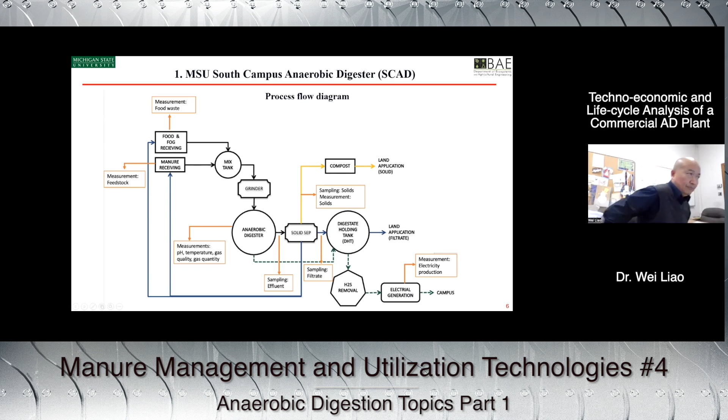And those yellow boxes are the samples we take. And because we have labs next to the digester system, we do intensive measurement on those and monitor the whole system. This is why we generate, later you'll see, all the data we have. So that's kind of the process flow chart for our system.

And then kind of jumping to the waste streams that we're handling. Roughly, we handle 8 to 12 different types of waste streams. And manure part, we do have the dairy and the chicken and the swine manure into the system. And the food waste is very much the pre-consumer and the post-consumer food waste.

But recently, I think, Chad, you probably run into the same thing for your digester. A lot of requests for the FOGs, the fat, oil, and grease. Currently, we dump a lot of FOGs into our digestion system. However, that's a very critical and very tricky part, the carbon-nitrogen ratio, because FOG carries a lot. FOG is good; however, if you dump too much into the digestion system, it could cause the failure of the digestion operation. So we monitor that very carefully, based on the carbon-nitrogen ratio, and also based on the fatty acid concentration.

And we have different systems to dump those wastes into our system. Some from the cafeteria come in carts, and we do have a tipper to dump into the pit, and the large dining halls on campus, like Brody, do have their pump machine, and they send it in containers to dump into the system, and this is a kind of truck that brings the FOG to our system, and then some other fruit and vegetable, a pretty big piece.

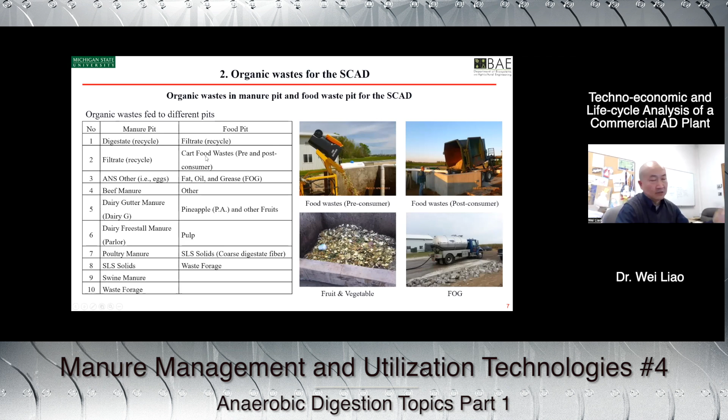So we do need a shredder or grinder to reduce the size before pumping into our systems. So these are all kinds of, see, the very diverse feedstock streams we have. So just from fat to food to pineapple peels. And one time in Michigan, because of the egg issues, the entire cart of eggs we just dumped into our systems. We handle those things in two pieces, the manure piece and the food piece.

And then we record all the data. So we have this radar chart, and for each category of the waste streams we handle, we track them on a monthly basis, 12 months, and we make those charts. We started this new system in 2013, so we collected all the data from 2013 till now, but this presentation just ends at 2020.

You can see the food piece and manure. We actually feed around 47% of our total digester feed from food waste. So it's a large portion of food waste.

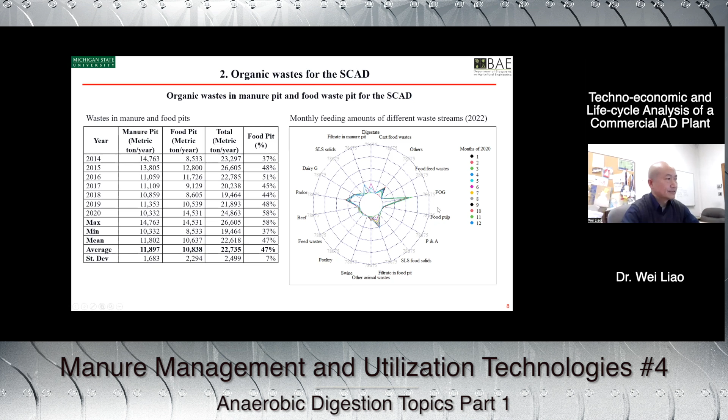I remember somebody asking us about the RIN numbers in terms of co-digestion or biogas from co-digestion. That's very tricky, because with that much food waste it's hard for you to claim RIN numbers. The RIN number is based on the particular D3. It's based on the cellulosic base. Manure could be, but food waste is a bit tricky. So that's something I think Nick can probably answer a little bit more from an EPA standpoint, the regulation, those things.

So this is our organic waste, and we do run detailed characterization of those feedstocks, like our manure from the dairy farm and the beef. We have some beef manure there too, and those different things. I'm not going to jump into the detail, but we do the total solids, volatile solids, pH, the electrical conductivity, and the soluble COD, TN, TP, ammonia.

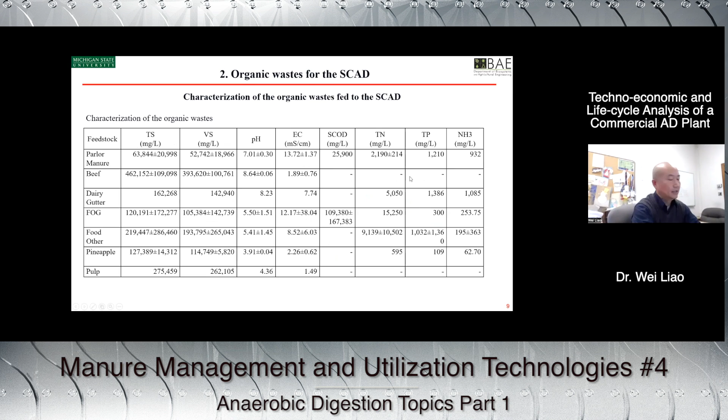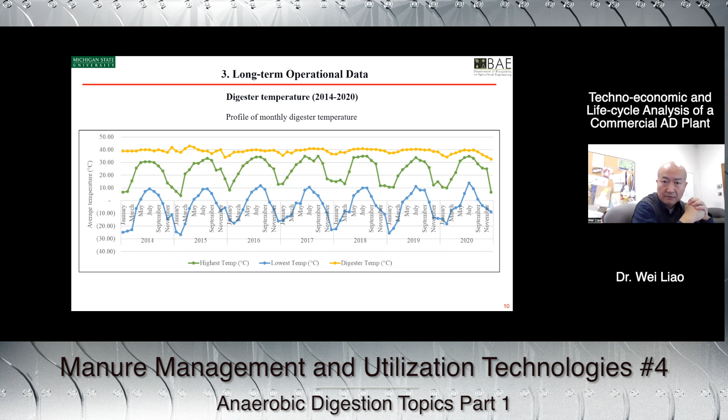Again, this is our consideration with such a big tank. If the temperature varies, it's very hard to bring the temperature up. So we're trying to maintain the temperature a little bit higher than the required 35 degrees C. I think most digestion operations around the country are probably doing the same thing as ours.

And then the HRT, we record based on feeding and do the calculation. Our HRT is between 20 to 25 days. There are some occasional variations in the feedings. Again, this is an agricultural operation. It's quite stable, but if you look on a daily basis, again, big variation. Sometimes we get like 30 days retention time. But the average is around 25, 26 days hydraulic retention time for our digestion operation.

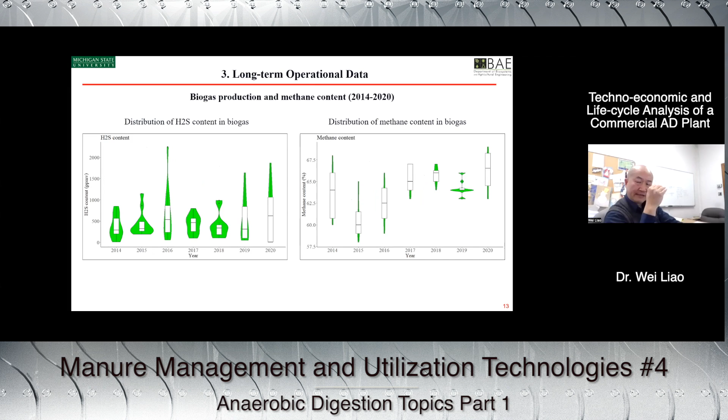Recently, a bit higher because we add a little bit more carbon stream into that. We go up to 70%, but the average is around 65% of methane content, volume based. And then we monitor the total solids in the digestate before it's sent to the liquid-solid separation. We do monitor all those total solids pumping to the systems, and nitrogen too, phosphorus, and pH.

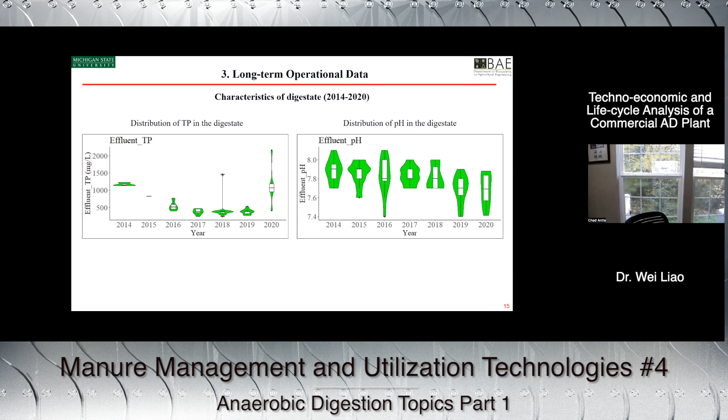Again, pH, as Chad earlier mentioned, is the simplest, easiest way to give you first-hand information on how healthy your digestion is. So if you can maintain about 7.5, your digestion is okay, doing fine. And if you're dropping quickly down to 6 point something, below 7, then there are some issues. You do need some red flag. You need to consider the feeds you feed into the systems, probably too much carbon, those kind of stuff.

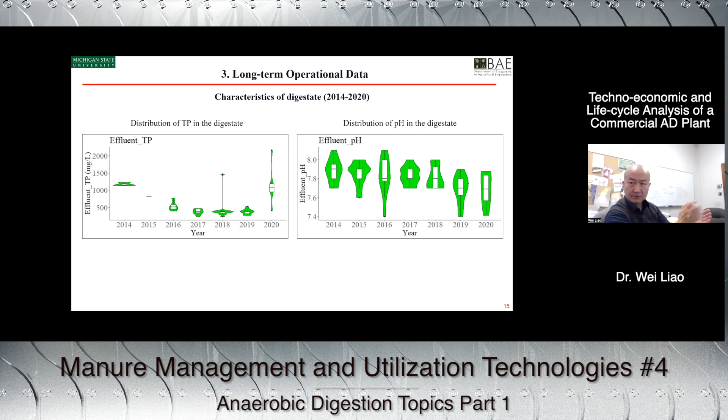And then the TS/VS reduction. Again, in our system, we have roughly around 43% total solids. Again, the particular mixed streams from manure, our dairy farm is organic bedding. It's not sand bedding, but still there's something in there that influences total solid reduction. But volatile solid reduction is around 48%. It's a typical number for agriculture digestion systems.

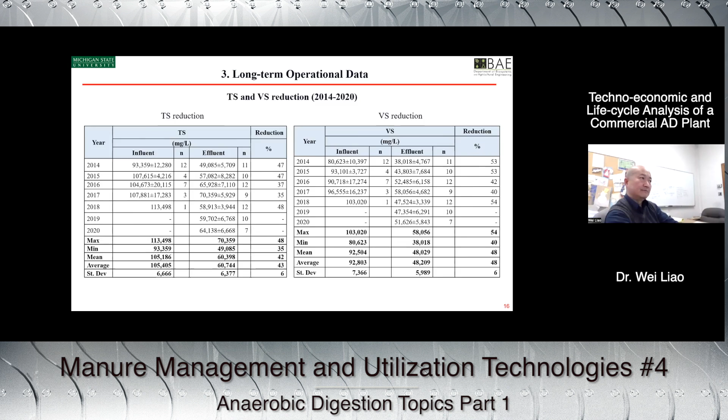And this is a kind of summary for our operation, really trying to lump everything together for the past 8-9 years of operation. Our input, based on yearly average, we roughly feed 22,000 metric tons of waste into our system. Literally split half from agriculture manure, half from food waste, and then we generate, on an annual basis, 2.67 million kilowatt hours of electricity.

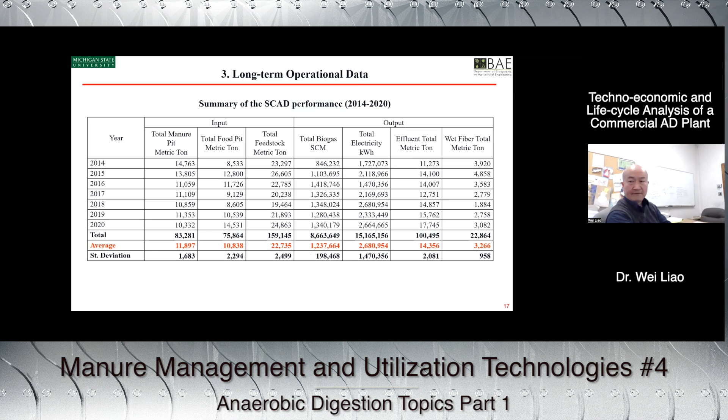And then the effluent was separated. We have the wet fiber, and we record it because it is used for composting. We do need a meter to know the amount of wet fiber sent to our composting facility. So then, with all that operational data, we want to summarize. We want to do techno-economic analysis and life cycle analysis. So we actually have two aspects on that.

At ADREC, we do a lot of feasibility studies for different company farms around the country, around the world. Actually, we do something for Latin America too, for feasibility studies. We gain certain numbers, put our experience on, run those analyses, and show them the payback period and other information they need to know. But for this techno-economic analysis and life cycle analysis, we get all our data, put it together, and really look into the real performance of our system.

So what do we do? This shows you the approach, and we have a lot of data; this presentation cannot show all of it. We run mass balance first because we record all the data on an annual basis. This is the average between 2018 and 2020, but we run it every year. The mass balance covers the amount and characteristics of feedstock, biogas production with different composition, methane, carbon dioxide, effluent, wet digestate, the filtrate. We keep tracking all those numbers because we need a mass balance to run the next steps, the techno-economic analysis.

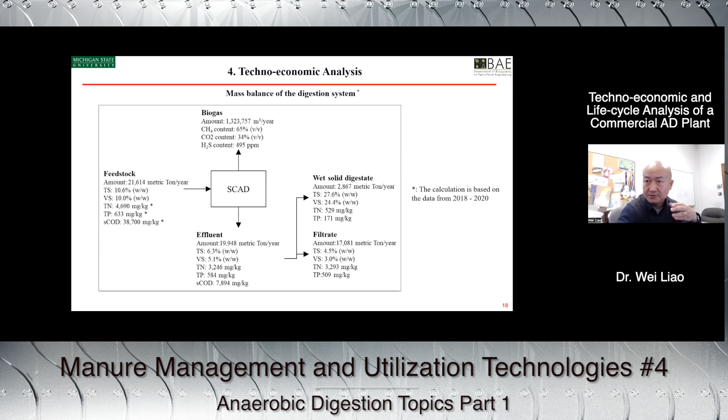So building on the mass balance, we record energy consumption and energy generation, and run another detailed energy balance. We meter everything. If you look at heat input and electricity input to maintain digestion operation, and all the energy output from biogas production, our system in the Michigan winter is pretty cold, and we roughly use 10% of the total biogas energy to maintain operation, pumps, the heating systems, and all those things.

Which means, as an agricultural digestion system, we do have pretty good net energy generation. 90% of the biogas energy could be revenue, used for renewable natural gas, which we talk about later on, and then electricity, or even using methane as a chemical to produce some other feedstuff.

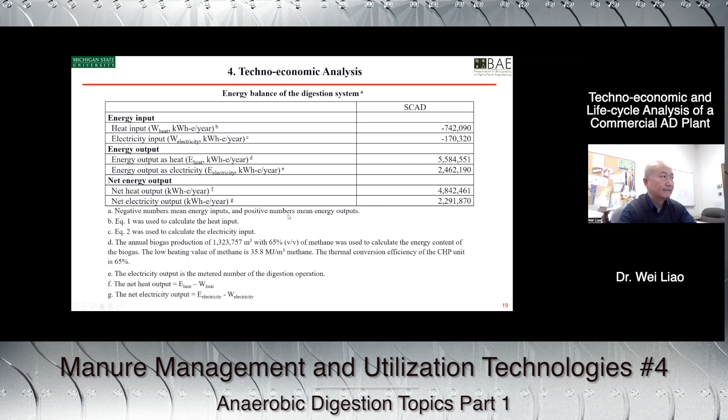So this energy balance builds on the mass balance, then incorporating other parameters, the capital investment and operational investment, we can run a TEA, techno-economic analysis. So roughly this is our investment. Back in 2013, we put $3.5 million to build the system.

And of course, the digesters is a big component. And actually, I have to emphasize on it because we have two tanks. That 2.1 million gallons of holding tank, we spend quite a bit of money. It's very large, right? This is why currently our research very much focuses on digestate treatment.

We want to develop economically feasible solutions that can treat liquid digestate right away, and then reach at least discharging standard, either linked to your municipal wastewater treatment plant operation, or can we reach high quality so we can direct discharge. Then we can reduce this digestion cost by half, and really save quite a bit of money there.

And the other part is, I have to say, the electricity part. I think we have somebody from the consulting company that has been doing the paperwork. Those interconnections are really a hassle. I can tell you, Chad is here too. Let's talk to those utility companies, right? And with interconnection, particularly the volume matters. If you have a megawatt or a couple megawatts, the production probably puts you in a little bit good shape. But for those small, medium agriculture operations, it's hard to do that kind of stuff.

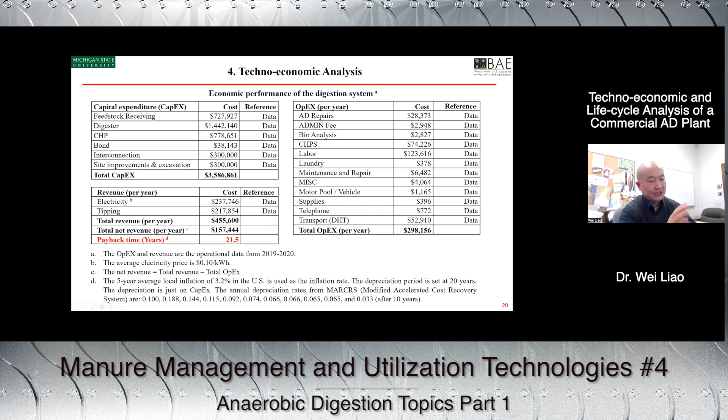This is why we need a package of solutions. Renewable natural gas could be one. Right now, MSU is very much involved in electric vehicles. So if we can turn electricity from small dairy farms into EV charging, that's another story. That's why the E-RINs, a lot of rumors, as Dave mentioned, and we really don't know what the E-RINs look like. Hopefully the regulation or policy will benefit digestion technology in small, medium operations. We can talk later on regarding our techno-economic analysis. And we did the sensitivity analysis, you can see the revenue, electricity, the cost.

This calculation is based on 10 cents per kilowatt hour selling price for electricity. If I increase that selling price by 25%, the payback period is reduced to around 10 or 11 years. 10 years is much better than 21 years. And this is about revenue streams, something we need to really focus on.

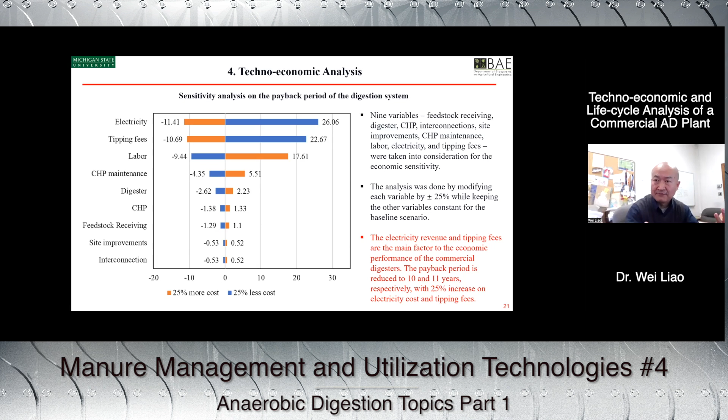No matter renewable natural gas or electricity for EVs, we do need package solutions to help the agriculture side. Municipal is a different story, but same thing: if you increase revenue streams, it will help the municipal side as well.

Then let me quickly go through the life cycle assessment part. Again, we compare with conventional operations like landfill and lagoon storage for those agricultural waste streams. Landfill is pretty much for food waste. Solid food waste is very much going to landfill, but manure we store in big lagoons in most agricultural operations. We compare that to our co-digestion systems, scenario 1 and scenario 0.

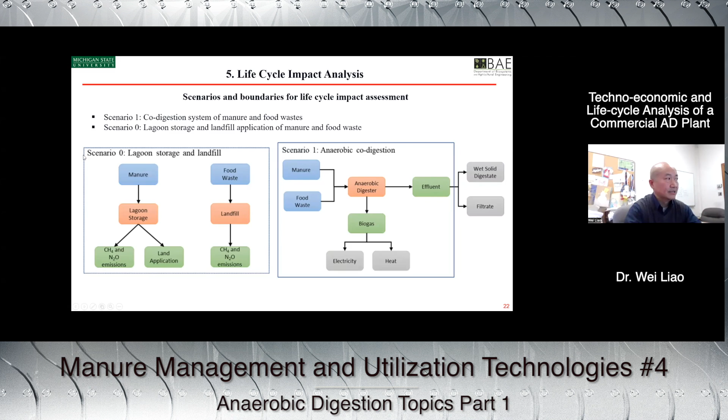The life cycle is very detailed. You need to build the inventory. It's literally like a big mass balance analysis, every single atom related to carbon, because we focus on two impact potentials. One is the greenhouse gas emission potential, very important. The other one is water eutrophication potential.

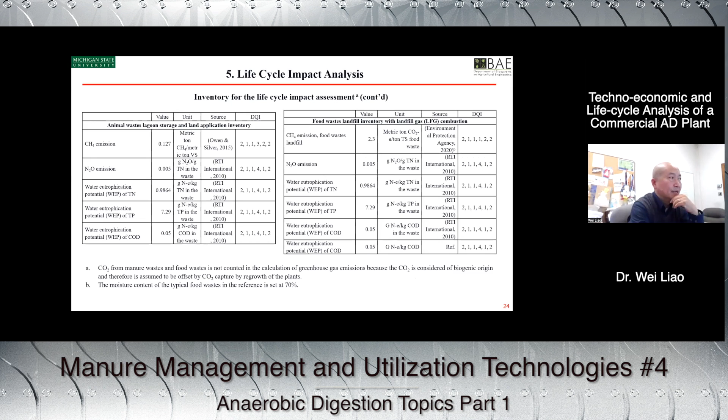In terms of phosphorus and nitrogen, a lot of people say liquid digestate is a good fertilizer, but many of you in the audience, if you're from the farm side, will tell me how difficult it is to handle liquid digestate as a fertilizer. You need to watch a lot of things, and a lot of labor is involved.

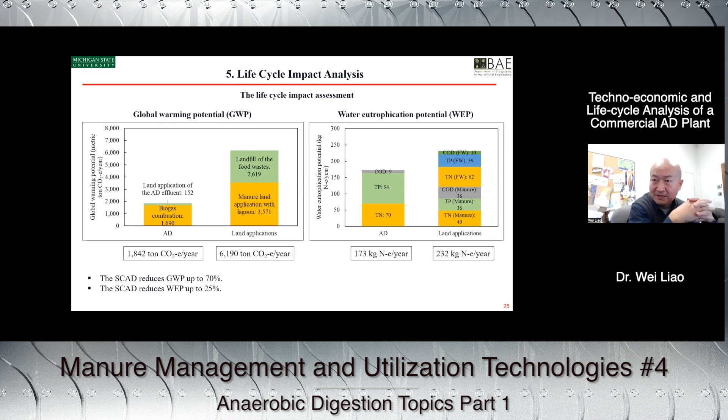But again, this is what I mentioned. If you can generate revenue from the carbon side, then we use that revenue to support nutrient and digestate handling. That makes the whole loop closed and actually moves digestion technology to the next level. So that's the bottom line of the talk, and I know it's close to lunch.

So this is just what I mentioned in the presentation: multi-waste streams are the way to go if you want to increase methane production. But of course, if you're talking about the RIN number, it's a bit tricky. If you want to claim cellulosic fuels, you have to stick with manure. And again, as mentioned earlier about the liquid digestate from the life cycle, we do need technologies to handle phosphorus and nitrogen in the liquid streams.

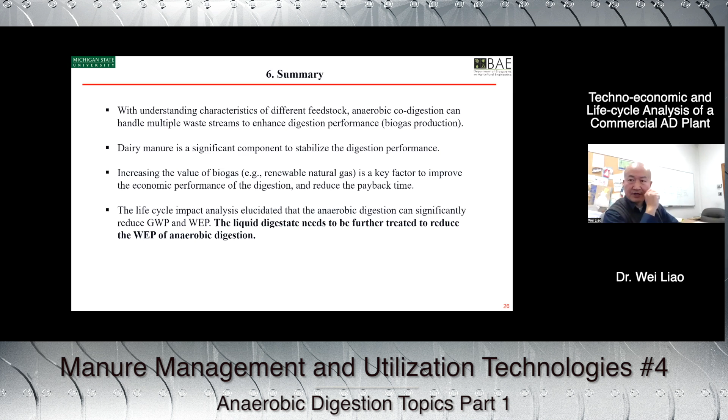And this is our anaerobic digestion center. We run a lot of things for different sectors, government agencies, and companies. We do BMP tests and feasibility studies. We have all kinds of pilot systems, container-based systems for different tasks, for military bases and small communities. And we have international center hubs, like in Central America, Costa Rica, with small pilot systems handling waste for that part of the world.